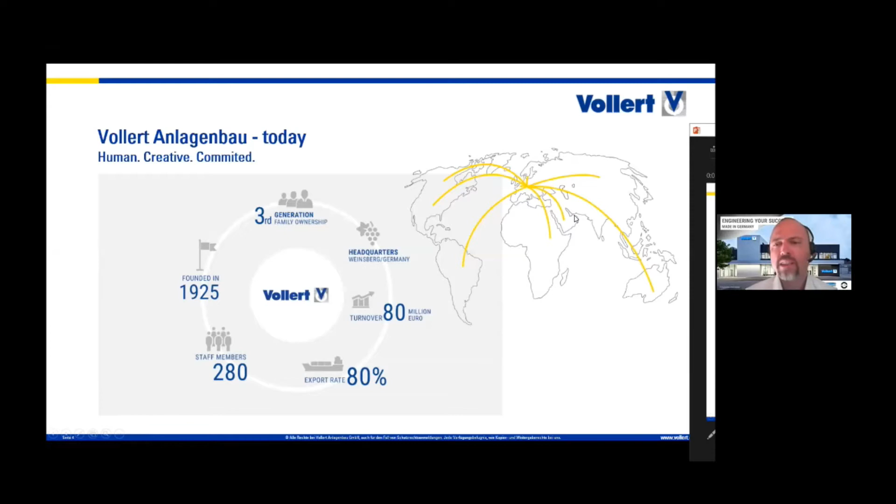So Vollert offers you a powerful range. We are the innovation maker, technology leader since 1925. We offer solutions for precast concrete production, which we will now discuss a little bit more.

We also have some other branches, like solutions for intralogistics and processes, and solutions for shunting and loading processes. One part which comes more and more important, and will also be very important in India, is the after-sales service—that means that the performance of your equipment is always in good shape. So we supply you with spare parts, with retrofit, and also with maintenance work.

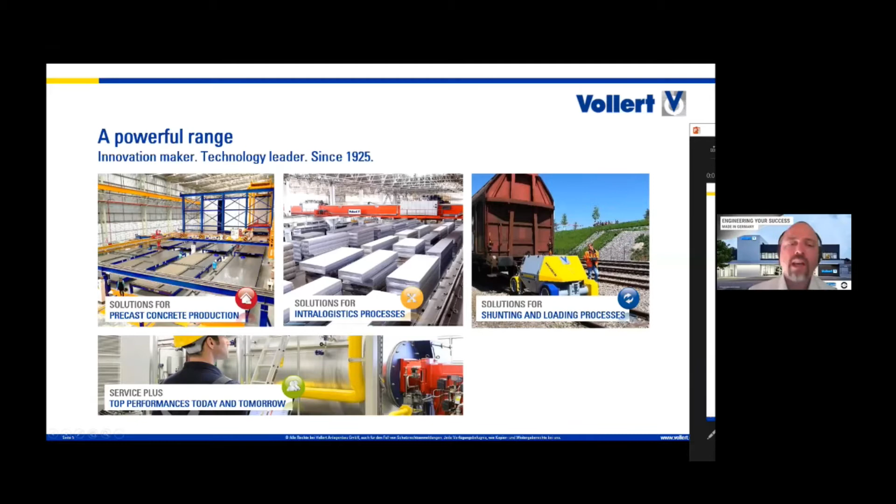The precast division, Smart Precast Solution, has the main focus on your project. That means if you have a project, we go into deep detail with you to find the best equipment for your project, cost-wise and also technology-wise. We have a large variety of equipment available, from stationary equipment like tilting tables to special formworks for different kinds of elements, up to automated circulation lines, and we always use state-of-the-art technology like robots, plotters, and storage systems.

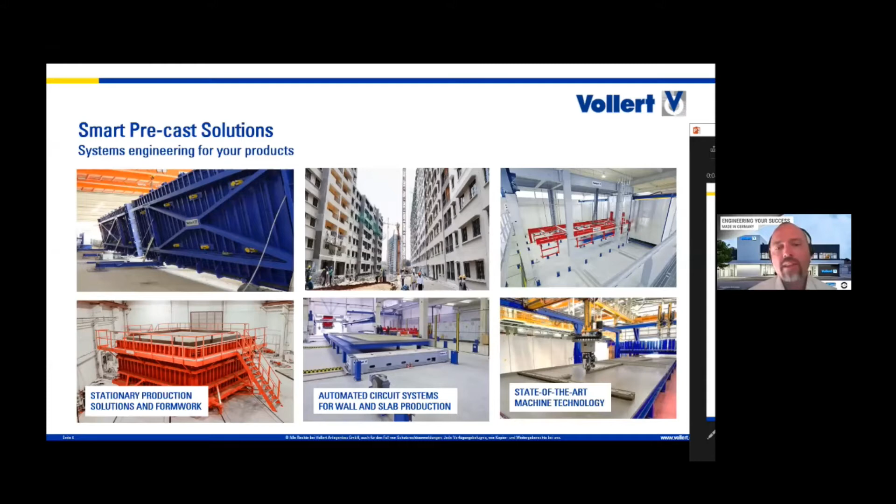So now we come to the PBU. Why should you design or produce PBU? There were a lot of points already mentioned before—it speeds up the erection process, of course. It's cost saving, you have better control of finished products, and you can achieve the best high quality when you produce the precast pods within your production facility and not at the construction site.

And another point which I think is quite important: everything is predefined with your bathroom pod. If you install it within the building, all the connections are defined, so the next working part can be done easily and fast.

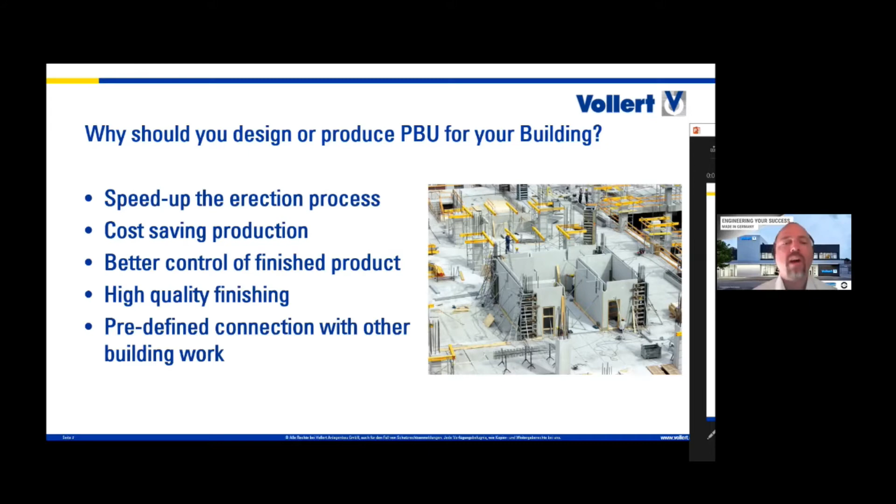But this requires a smart production. So what is all behind your product? That means you have to have a good PBU design—it must be watertight, this is a very important point—and you also need a cost-efficient mold system.

Not all molds available on the market are really cost-efficient, because they are very large in size and have a lot of, I would say, hydraulic installation and mechanical parts, which sometimes makes it very hard to speed up the process of producing PBU units.

So I will later on show you some different methods just to speed it up. Also, PBU production must be organized quite well, because you need specific working stations where you always do the same work, to also speed up the process.

Otherwise it's the same as at the site in your plant if it's not organized quite well. Also, a very important point is smart handling, so that the PBU units must really be in a good design, so that you can easily handle them during production, during finishing, during transportation, and also storage.

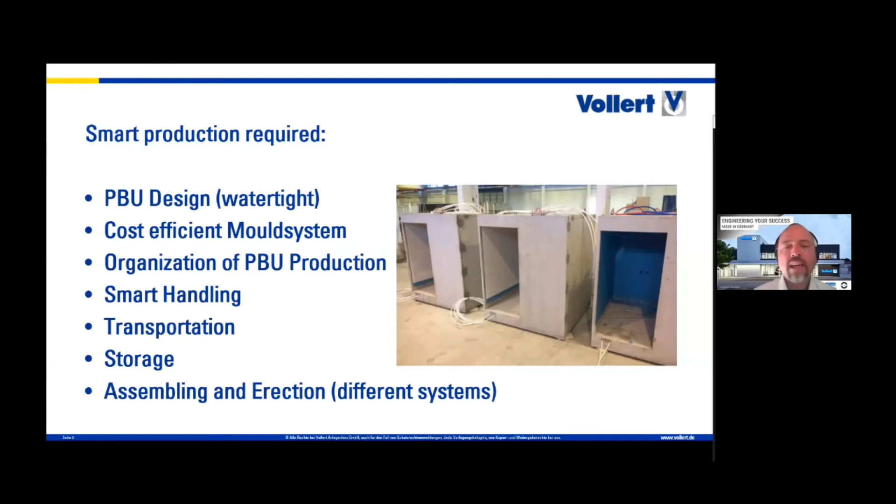Because if you use one of the two types of installing the PBU units within the building, you must make up your mind how you can store the pods in good shape at site or in your facility. And then the erection, with the different system—I would prefer the drop-in system rather than the pushing-in system, because it gives you more flexibility with the connections and everything.

So now we come to the three different production methods. One part is the single piece or multi-piece production of walls and floors. That means you can easily produce flat panels, roofs and slabs and bring them together to one large unit by some kind of predefined connections from available suppliers. This gives you the most flexibility about size, and you do not need a very costly or high price mold system. On the next project if you have a different shape, you have to reconfigure your complete mold, and when it's completely in steel, sometimes you're limited with modifications.

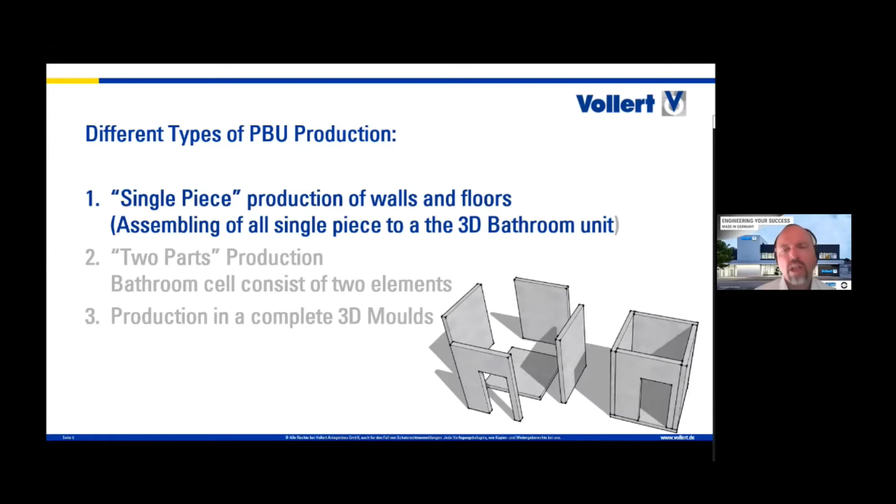So the multi-piece production involves installation of a complete circulation line. That means you have some devices which remain in position, like a concrete distributor, service parts, a plotter, cleaning devices and so on, just for flat elements, and also storage where you can cure your elements.

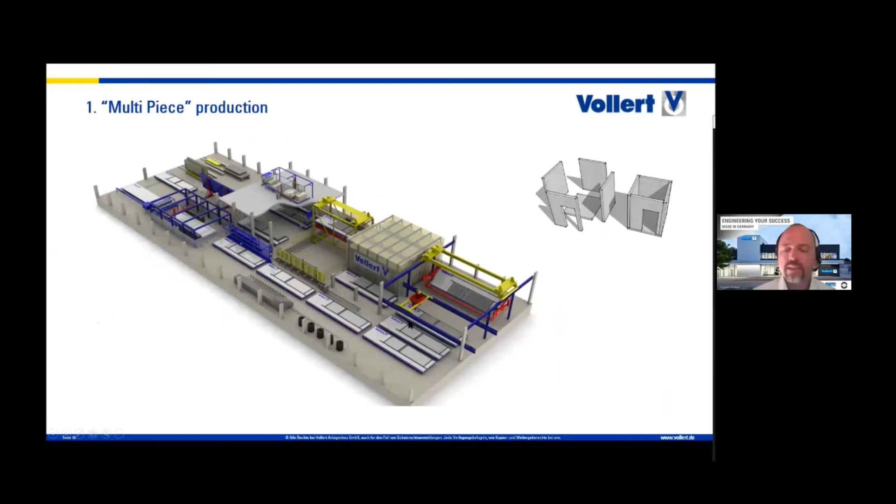Multi-piece production: the advantage is most flexibility for different precast elements. You can also have highly automated working steps, like placing the shutters within the system for different sizes. You get a high production output, more than if you have just molds. You have predefined working positions, so curing will always be in the same position - casting, placing shutters, putting in reinforcement. All these have standard positions where the workers know exactly what they have to do.

The disadvantages of it are the high investment, and you also need a large working space because the plant requires at least some space. There's also an additional working step - you have to assemble the precast elements next to each other. This is a step you have to do after you produce the flat elements.

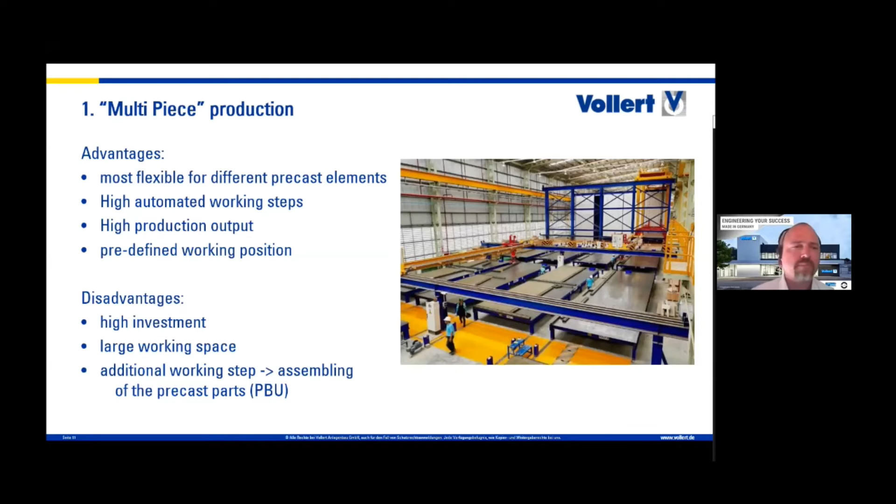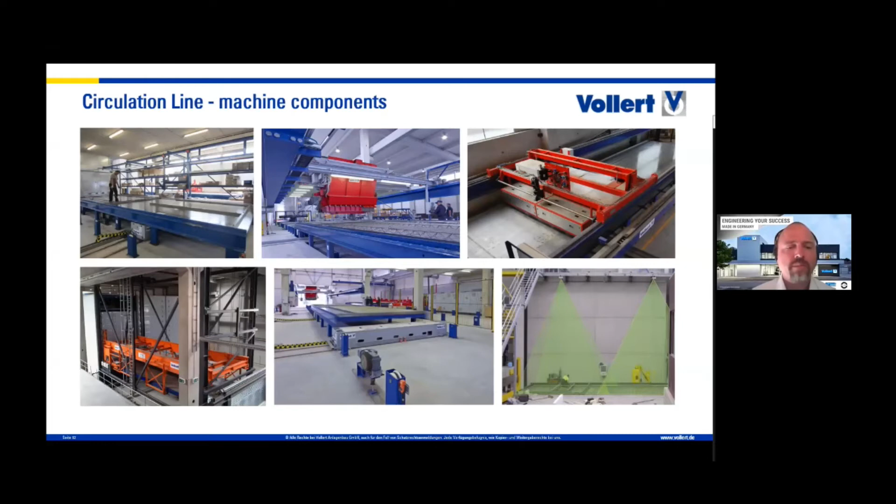So the next production method is the two-part production, for example bathroom cells in two elements. That means you have an L-shaped element and an L-shape with a roof.

The advantages are flexibility in different precast designs, because the L-shaped elements can differ in size, and also the roof part element can be different sizes, because you place shutters for the specific dimensions. You need a small working space, few connections between the two elements, and it's a very rigid, almost monolithic structure afterwards.

You can also produce several elements in one mold. For example, here you can cast 4 pieces in a battery mold, which can go up to 20 casting cells. So there you can also increase the production capacity.

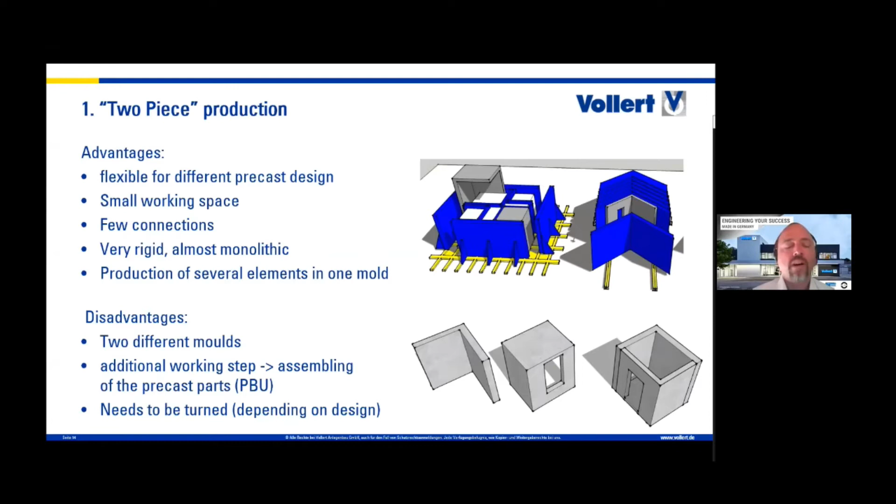The disadvantages are you need 2 different molds. An additional working step is that you still have to assemble the mold in 2 pieces, and if you cast it in this way, you need to turn at least 1 element to get the roof part, the floor part, as a precast element.

So this is a picture of an L-shaped battery mold. You see the casting cells here are dimensions 3 by 3, height of 2.8 meters, with 6 casting cells. That means 6 pieces per shift can be produced.

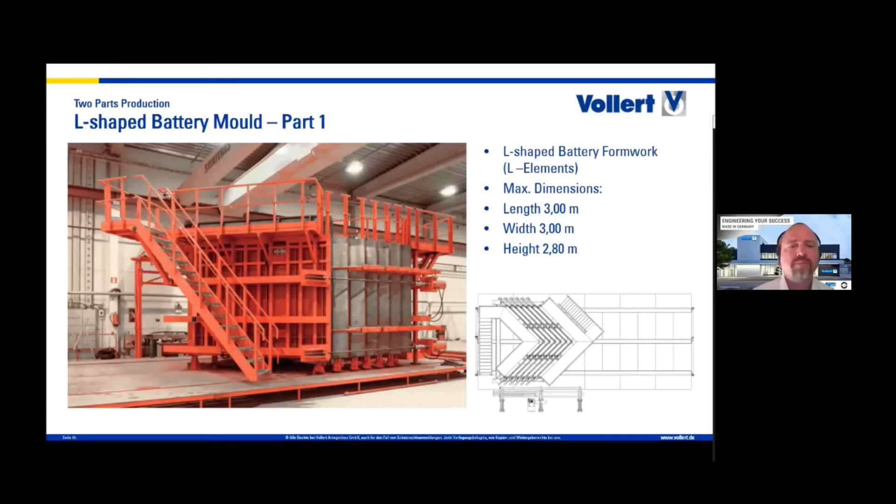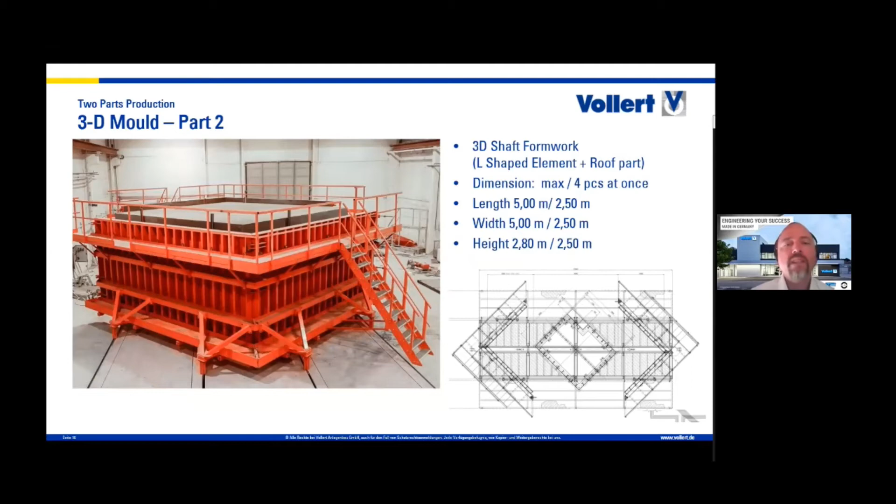And the other mold is a shaft mold. Here you see the outer walls with a larger scale, so larger dimensions, so you can cast 4 pieces at once in such a mold system.

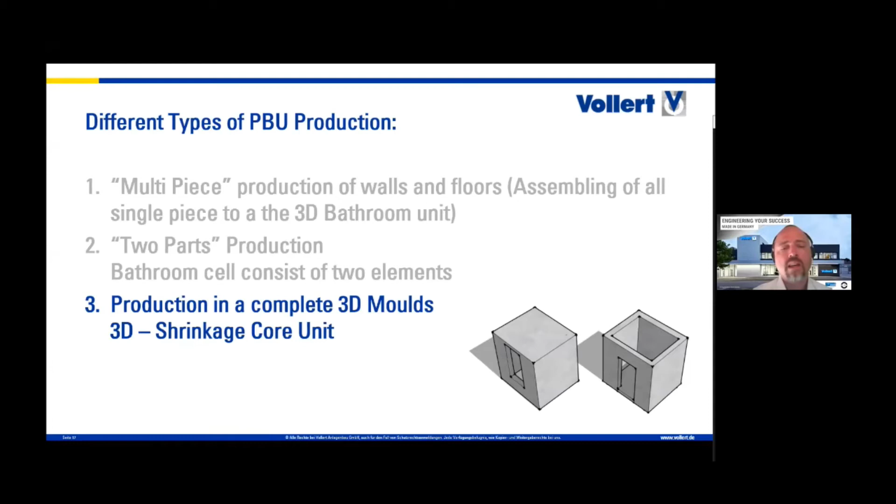The last part, which is most commonly known, is the complete mold. Very easy to use - you just open it, put the reinforcement in, and close it. But the mold is quite complicated because you need a shrinkage core, since all walls are 90 degrees to each other. Therefore, you have to implement a very flexible shrinkage core so the mold inside gets a little bit smaller for easy stripping off. The advantage is a monolithic structure, no connections needed, small working space, but you have a predefined mold configuration.

That means the design is fixed and frozen, then you place an order for a mold or produce it, and afterwards everything is fine because no one can disadjust the mold. The disadvantages are inflexible for different elements.

If there is a large difference in dimensions between the next project, you can only slightly adapt the mold, but not completely. It's a high investment with the shrinkage core because you need a lot of machine parts inside and also a hydraulic system, and it needs to be turned in this way.

Another way would be to just put the shrinkage core inside, then you do not need to turn it around, but then it gets more and more complicated. You still have to do quite good cleaning of the mechanical parts, because this would be the first part that gets problems afterwards.

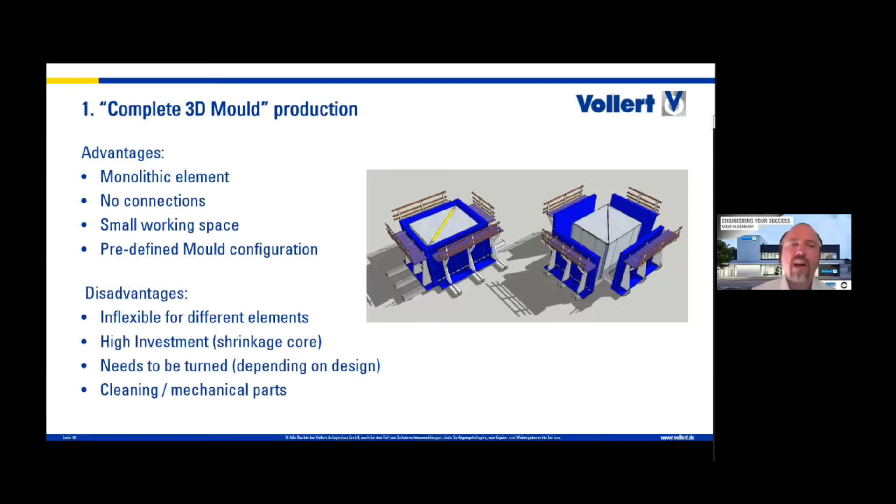So here you see a small shrinkage core from the inside. It's an open core with some hydraulic installation, and the mold from the outside. This is a very simple mold.

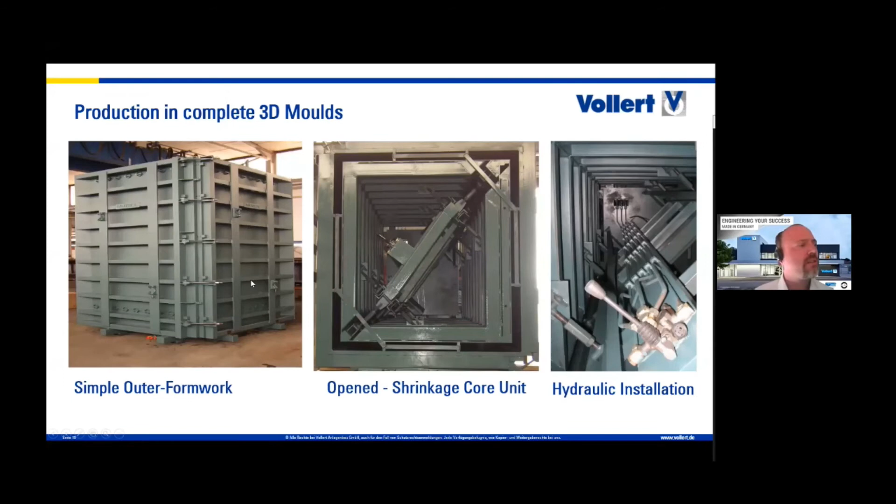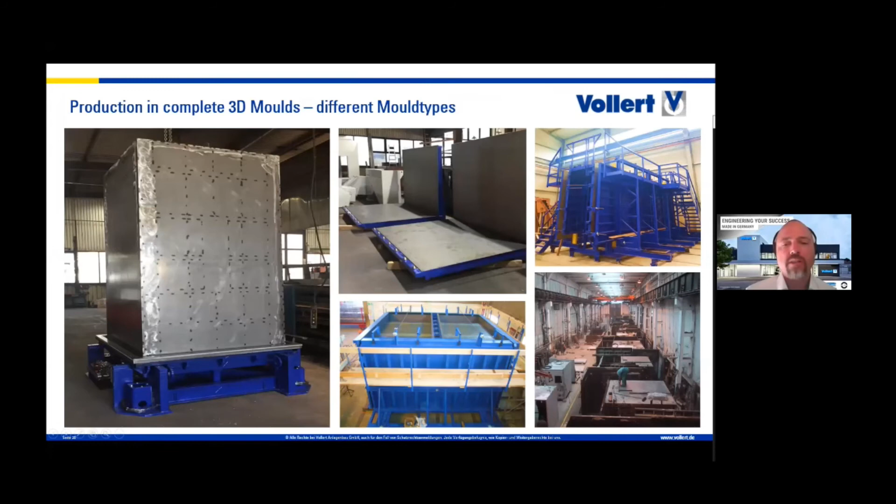Next, here you see the core inside, some L-shaped outer elements, or some different other molds. These are project-specific molds. And here on the lower side, you see a mold production within a building. You see a lot of molds next to each other, so this still has to be organized because it always will look a little bit like a mess.

All 3 production types also require a finishing line for assembling, plastering, putting tiles inside, or installation. So if you like to do this in your plant, you can completely finish your bathroom cell, maybe also with lights, and install it later on.

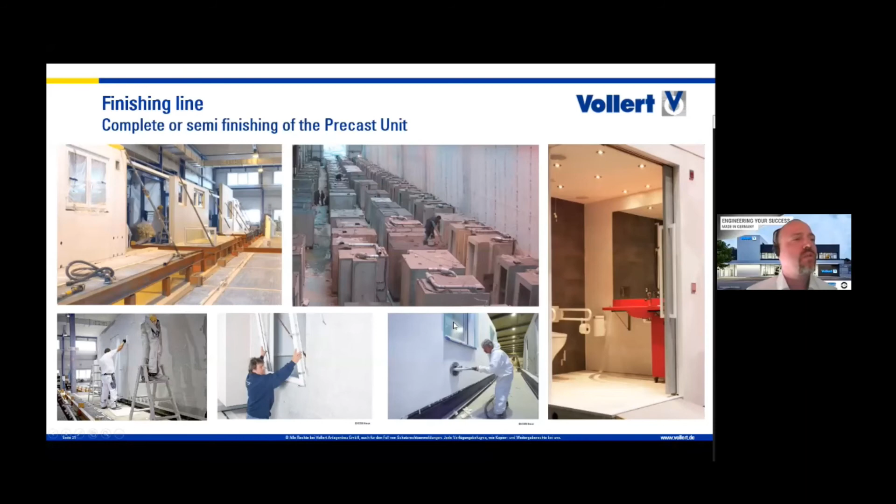Just take care that it stays clean until the building is finished. You have to cover it during transportation and installation. But for this you also need a large area just for the finishing of the precast units.